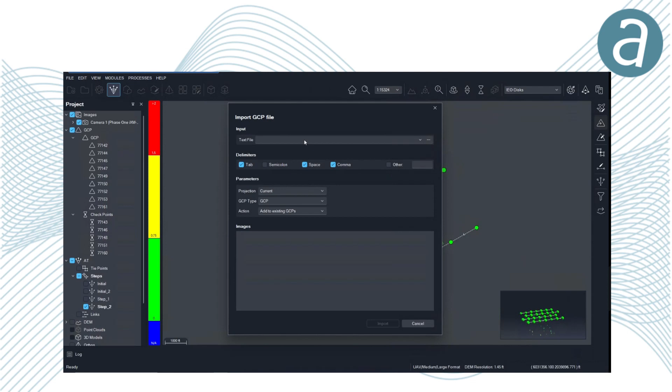And David, show them where they would load that file. Sure, let's go ahead and take care of that. Once you're within your AT module, you're going to navigate to this portion of the tool where you'll see it's an import GCP file. It's the second tool here, and we're going to click it. And it's going to ask you to input a text file with your GCPs. So you can go ahead and close that window.

So we've run our bundle adjustment, and again, you can go down to where we have the AT steps. Yep, in the directory tree. You can see we've got an initial 2 to tighten things up, then a step 1 and a step 2 where we measured control. And if you go to just the right of those, you can see the reports that were produced when you did those measurements. Go ahead and open that up. Here we go. So here's a standard report that we provide.

And the things that you need to know are the image tie points. The quality assessment is excellent. The number of tie points per image is 96. That's excellent. Your average projection error is very good. And then next you have some average information on ground control points, which we'll go into in detail further down. But again, it's showing you what your average error and your RMS error is. It's doing the same for the checkpoints.

But understand there's one big difference in Correlator3D and some of the other software packages out there. When we measure GCPs, the only GCPs we measure and hold to are the ground control points. Checkpoints are allowed to float. They're not part of the solution. So therefore, you can actually treat them as checkpoints. They're not messing with the data set. So that's one thing to be aware of.

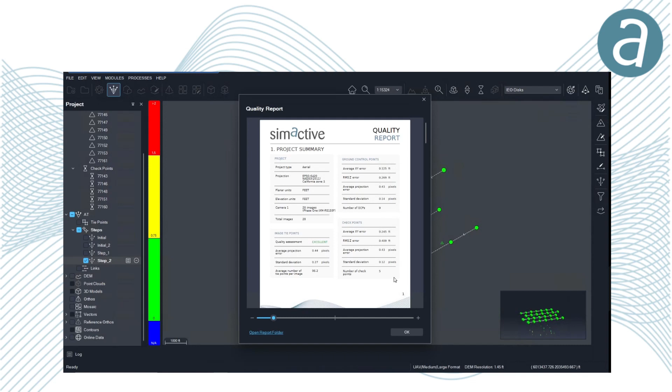If you scroll down, David, to the GCP portion of the report, and we'll give it a second to refresh. There we go. Now you can see all the points, the error in X, the error in Y, and the error in Z, and then a combined error. And then also, as far as pixel shift, how far it's off. So you can scroll down through all of them, but you've got all that information.

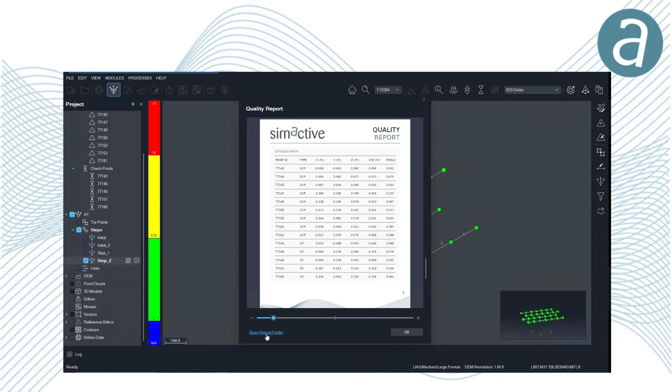Now, what's more important is all this information is still saved in raw format. So David, can you get to the folders so we can show the people the initial report? Let's do that. There's a quick link here to open the report folder. That would be the easiest way to navigate to it. Once we do that, it's going to take you to that last step that you performed. Yeah. So even though you probably have multiple steps, this is where all that information related to step 2 is stored. So go up to the original AT summary and open that up.

So here we have a very similar report, but it can give you a little bit more information. If you look at average GCP residual error, checkpoint error, those are all the same. But if we scroll down and we start looking at, for example, number of images without GCPs, average number of GCPs per image, things like that, you can start looking at your results and make some determinations on, you know, is the error valid?

Is that control point worth withholding? Things like that. And again, I think there's even a little bit more to that report. Yeah, there's GCP summary. Yep. There you go. So all that information's in there as well. And then we have some more files in that folder that break it down into even more detail. That's correct. There's specific sections for any of those elements, right?

As you mentioned, if we just want to focus on the GCP residuals, we can certainly open that TXT file and let's expand a little bit. It will give you a breakdown of the GCPs, the residuals plus the pixel residuals. Yeah. So you not only have that in the PDF report, but also in TXT format if you need to extrapolate any of this information in here.

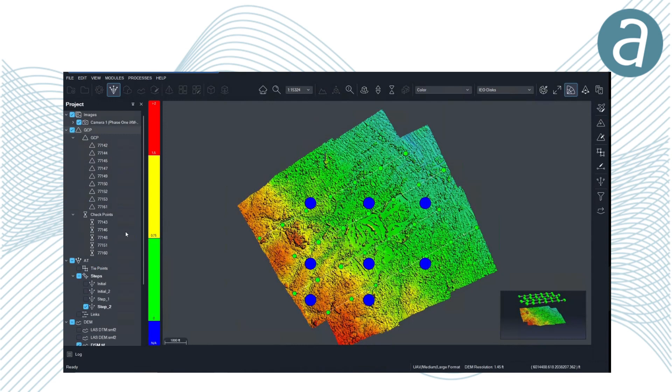Let's turn on the mosaic or turn off the DSM, either one. So here we can see the distribution of GCPs throughout the project. It's probably a little light in the northwest side of things because there's really nothing over there. But in this case, I just went through and took a random assortment of GCPs, converted them to checkpoints, and then ran the solution, not holding those GCPs.

Now, if you were really, really looking into this, you might want to run this AT again, flip some of those points, and see that the results are the same. And if they are, you've got a super tight solution. But it's called checking your data, or if there's a problem, it's called chasing error. And you may be able to do that and isolate out poor control points, or at least control points that were captured in a location that's probably poor for the solution. So that's something to remember.

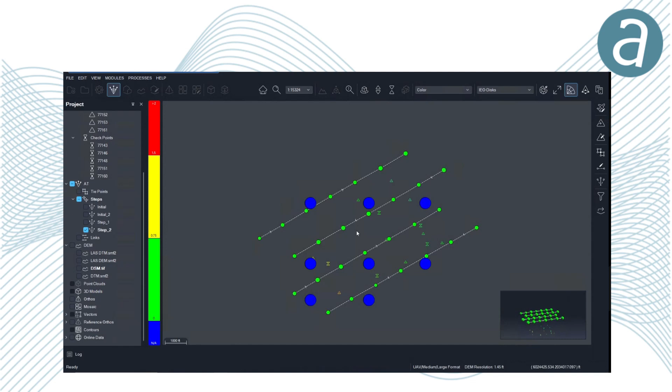And also, if you look at these, they're color-coded. So even the fact that they're color-coded helps you out. You can see in the lower left corner, there's some suspect issues there. So we like to make it easy for you to see these things within Correlator3D. So from that, you would create your surface, and then again, you would export your surface out to whatever tools you were using, and then run your final validation report based on those results.

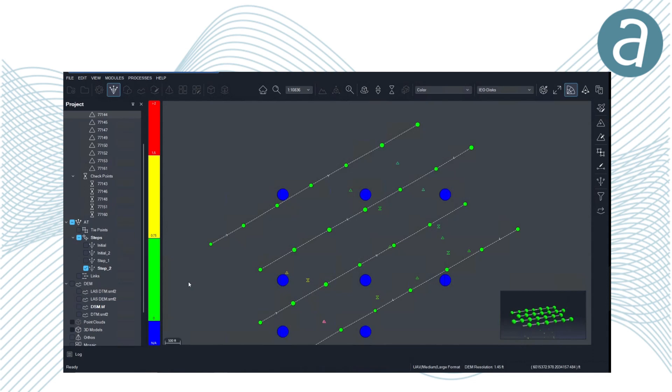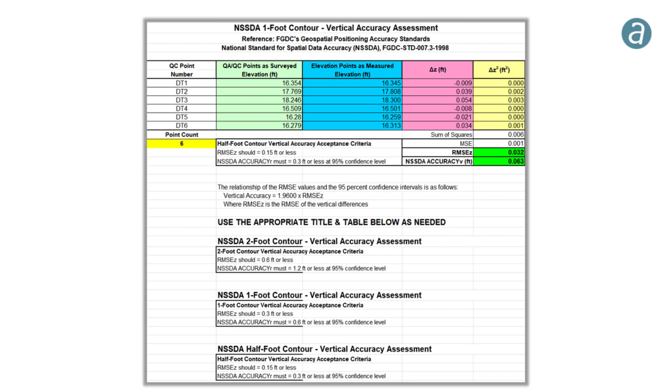And as I showed before, the NSSDA report, which is a standard one out there, it's nice. It's already got the vertical accuracy requirements for 2-foot contours, 1-foot contours, and half-foot contours under the current ASPRS standards. So you just put in your residual values, and it'll tell you whether or not you've met that accuracy requirement.